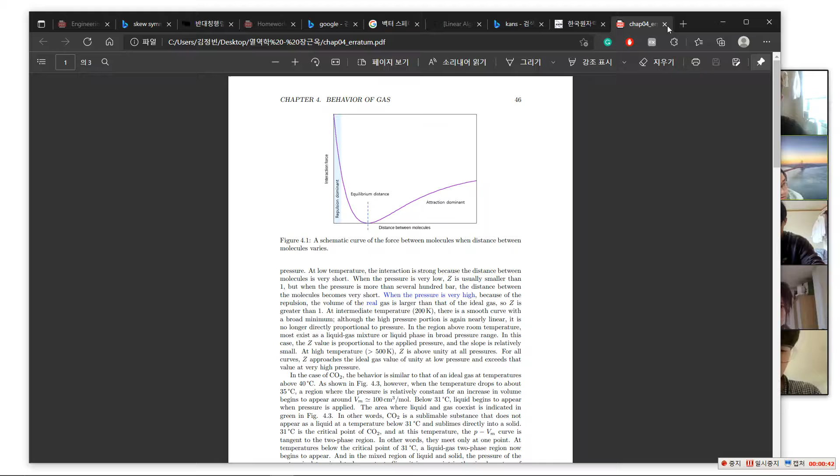So the concept of control volume is, if we want to apply the energy balance equation, in other words the energy conservation law, then the system has to be closed. System closed means the matter, material, or substance does not exchange.

Do not exchange. So let's say in a bottle there is 1 liter of water, it will not go outside or other substance does not come in. It is closed. Energy balance can be applied only on a closed system.

Assume you think about, let's say, a train. Then air has to come in, combustion takes place, and there has to be exhaust. The air comes in and combustion takes place, then there will be exhaust.

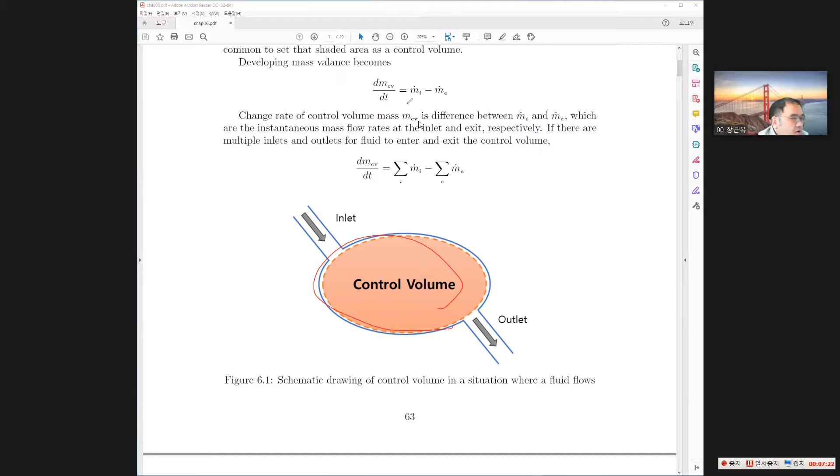There is no strict border line. So anyway, we can set a certain kind of abstract line which we say is a control volume, okay? For that reason, we want to apply energy conservation. However, typically, people want to also apply mass conservation, mass balance. Another terminology we say is mass balance.

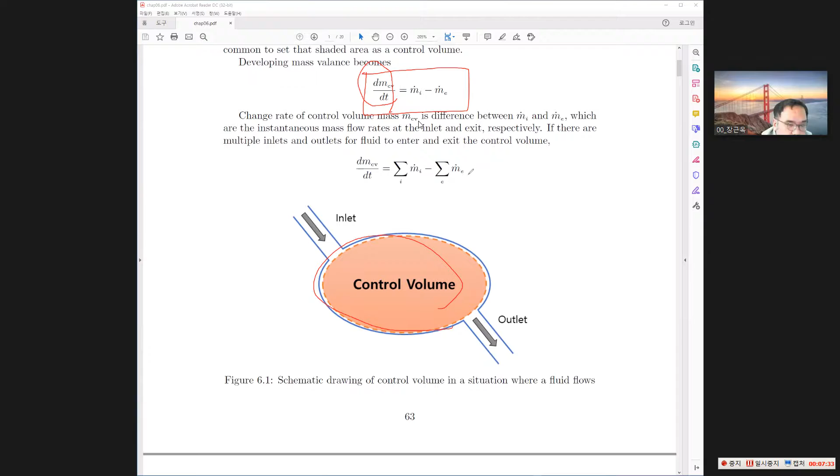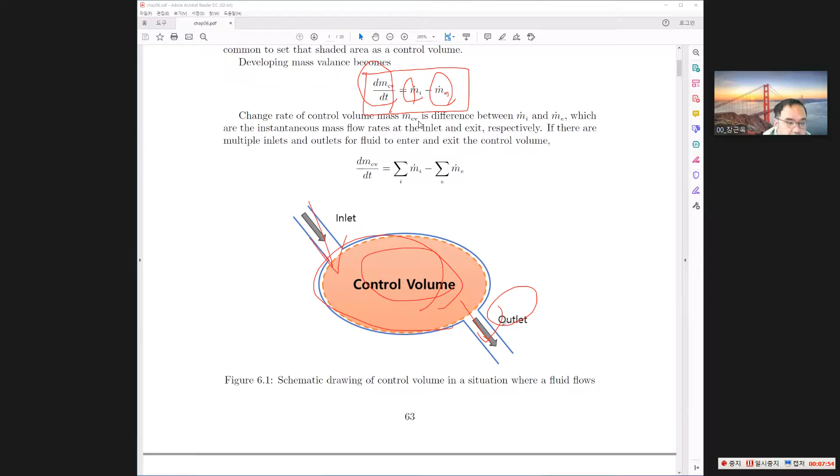Mass balance means the rate of mass change of the control volume is input, amount of input mi dot, amount of outlet me dot. In other words, outlet we also say is exit. So inlet exit or inlet outlet, both ways, okay. So it is typically very intuitive.

dm_cv/dt is, if there can be multiple inlets, then summation of inlet flow, minus summation of outflow, has to equal the change rate of the mass of the control volume.

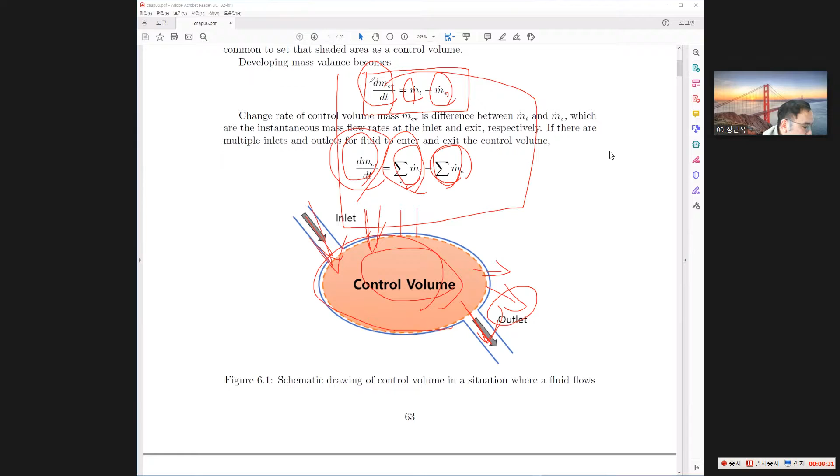So any questions on this? Fine? Okay. Here is one concept.

So v is specific volume. M dot is mass rate. Let's think about V, which is specific volume, determined by volume over mass. So in that case, what is the volume? Let's say, assume a kind of cylinder, and in that case mass is given, volume is given by A multiplied by height H. A is cross section, A multiplied by H.

Assuming the flow only, we assume unidirectional flow, like a certain fluid flows in only one direction. Then once we know the velocity, V dot is given by A times V, which is velocity. It is not volume, it is velocity of fluid, okay, velocity.

Because velocity means nothing but dh/dt in this case. Let's assume the height of the fluid region is h. So once we take dh/dt, it is nothing but velocity. So V dot, actually, V dot is AV.

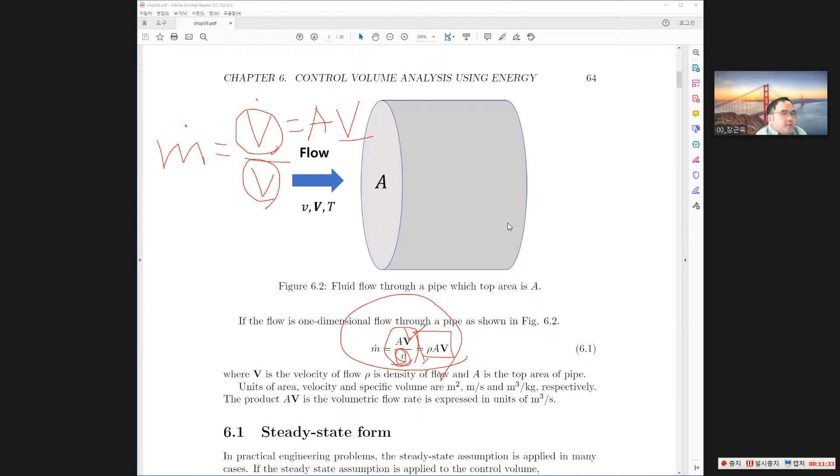So there are two ways, please don't be confused. In your textbook, I make it bold to prohibit the confusion. And inverse of the specific volume is nothing but density. So we can write it down this way. So any questions or comments on this relation?

Professor, yes. That V dot earlier, is that volume rate? V dot is V dot. You said V dot means AV, that means volume rate or what? Here it is volume rate, and here is now like a velocity. So those two are different. So volume, the velocity, I represented in bold symbol.

Professor, I have a question. How does the P come out, where is P, here? This? Yes, PAV. No -- rho is a density. Thank you. Rho.

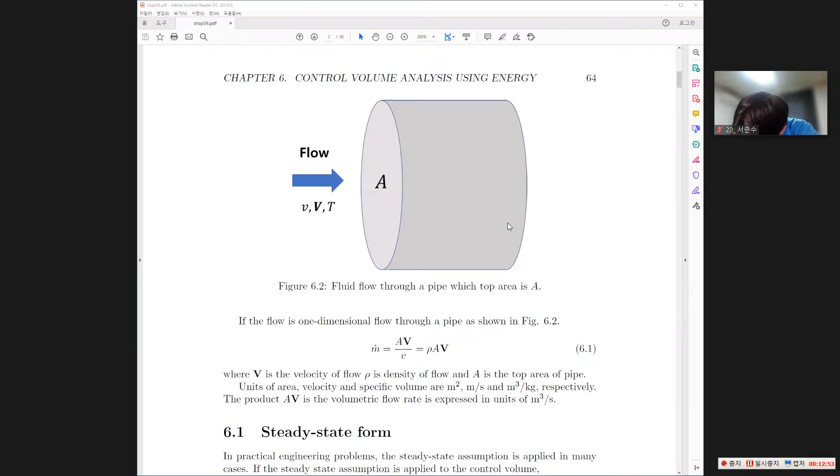Then we would like to move on to the other concept: what is steady state? Steady state means the state of the control volume does not change with respect to time. So dmcv/dt equals 0. It means the mass of control volume does not change. So in that case, those two values have to be balanced.

It's quite obvious, right? If you earn $100 and you spend $100, then your balance has to be 0, right? So it's like the same as the balance, right? Balancing, okay, so here is balancing.

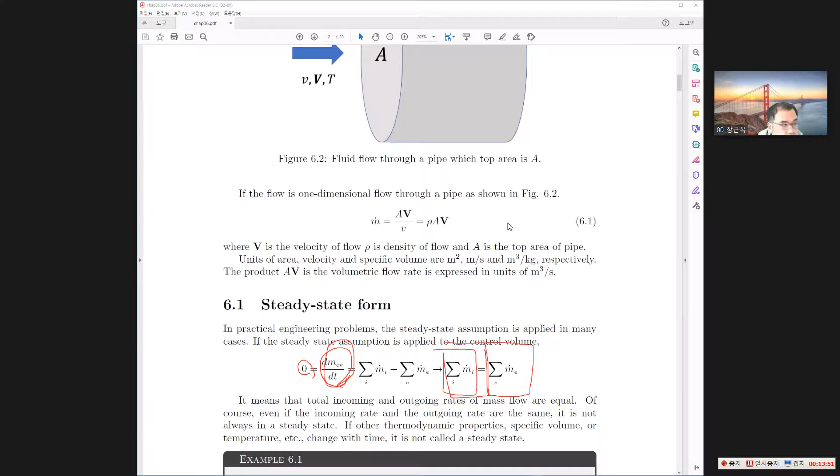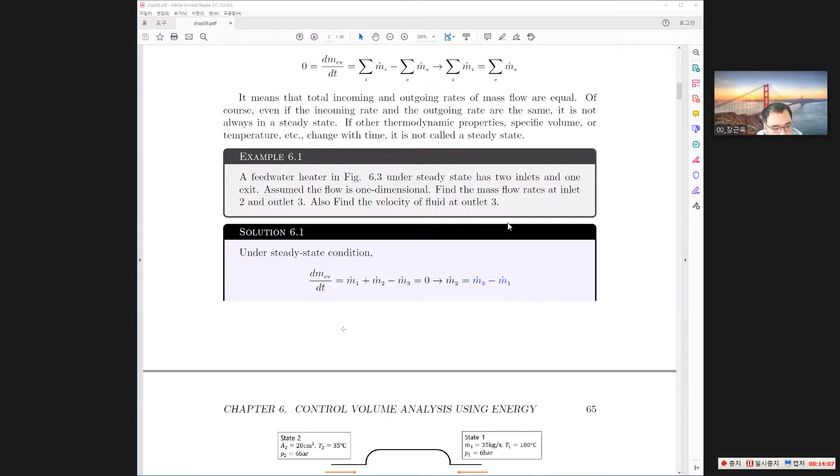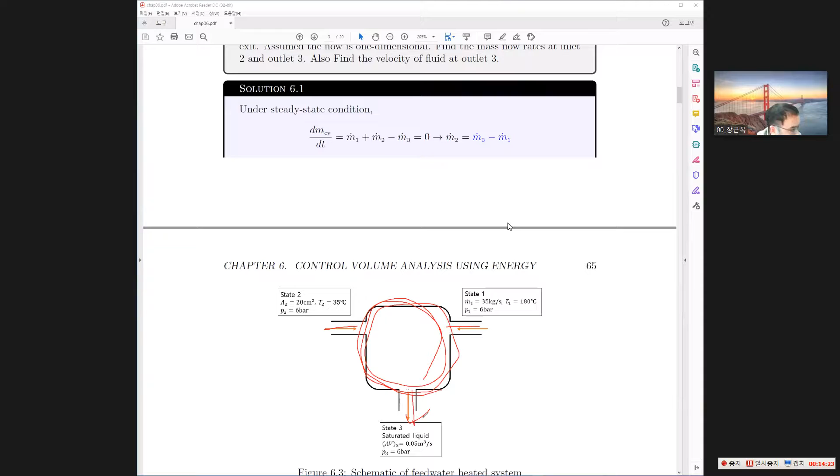Okay, so there used to be a typo here, on the blue side. So we have the opposite. Let's assume this system, and the control volume is here, and we assume that there are 2 inlets and 1 outlet. So why is there a positive sign? Because it is inlet, and outlet have to be negative sign. So by that way, we have M2 dot equals M3 dot minus M1 dot.

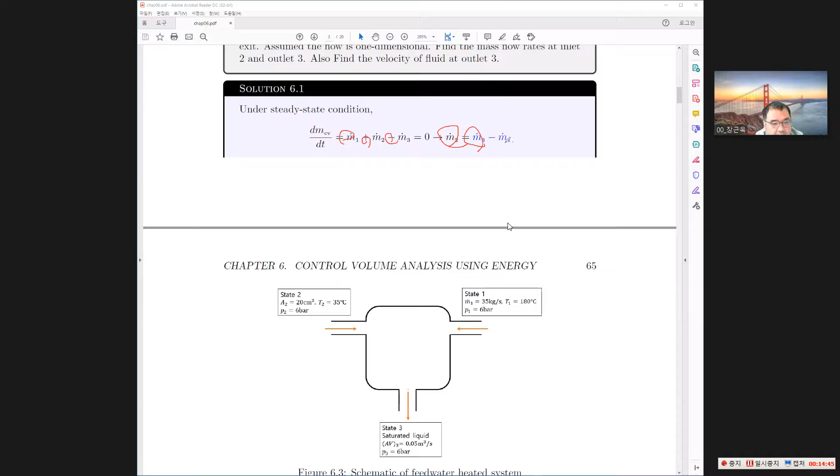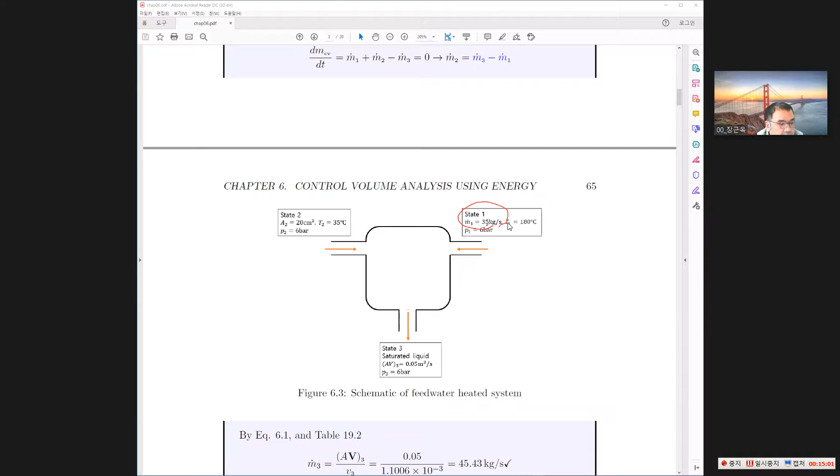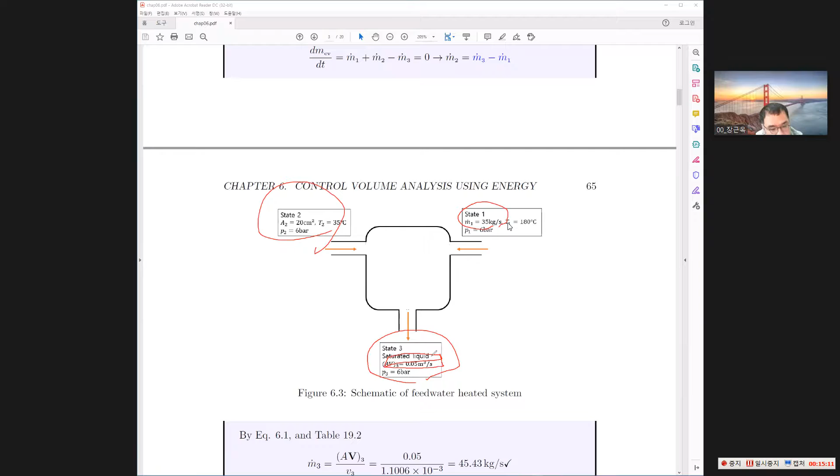By that way, first of all, M1 dot is already written in the problem, right? 35 kilogram per second. M2 dot, we don't know, we would like to calculate it. M3 dot, there is no direct value, but however, there is some information on it, so we would like to utilize it.

Formerly, we studied about those relations here. So once we divide by the specific volume, then we can calculate the M3 dot. Those specific volume values come from table 19.2, and we have what kind of information?

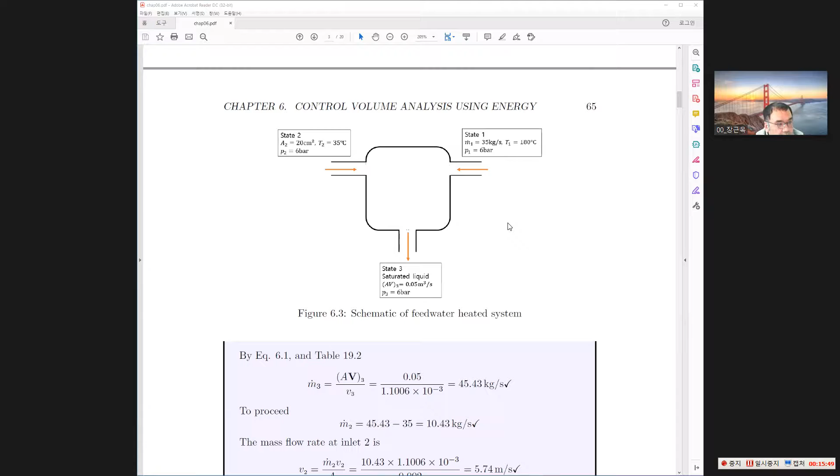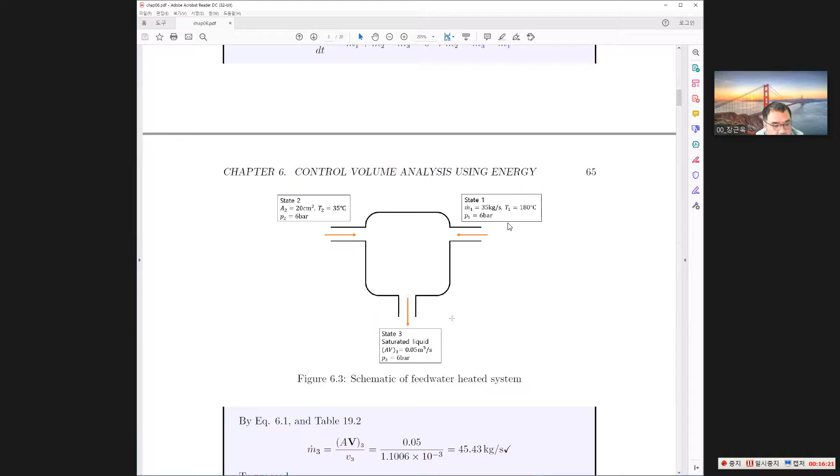Pressure. We have pressure information. Go to table 19.2. What was the pressure? Tell me, what was the pressure? 6 bar. Okay, so now we have the specific volume here, so we can utilize that information.

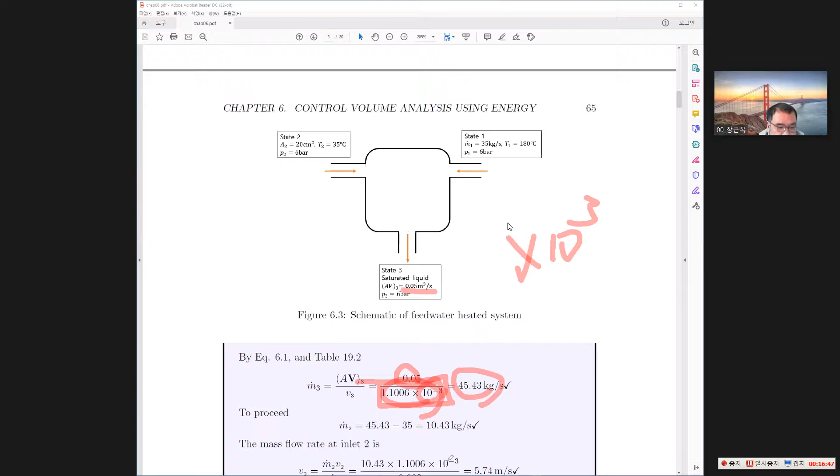There used to be a confusion. When I multiply by 10 to the 3 in the table, it means we multiply that value by 10 to the 3. Originally it is 1.1006 multiplied by 10 to the negative 3, and 0.05 is given in the problem. So once we divide it, we can calculate M3 dot as 45.43. So therefore M2 dot is given by 45.43 minus 35. We found that M2 dot is 10.43, by the mass balance.

Then how can I calculate V2? Also using those relations, we can calculate V2. At inlet 2, there is information on the cross section, so once we divide it, we can calculate the flow velocity, which is given by 5.74 meter per second.

So what is the main assumption? The main assumption is that it is a steady state, so mass of the control volume has to be conserved. Using that relation, everything is going on. If something is not clear on this problem, please let me know.

I have a question. Yes? In the inlet 2, I mean state 2, how do we know for sure that it is still saturated liquid?

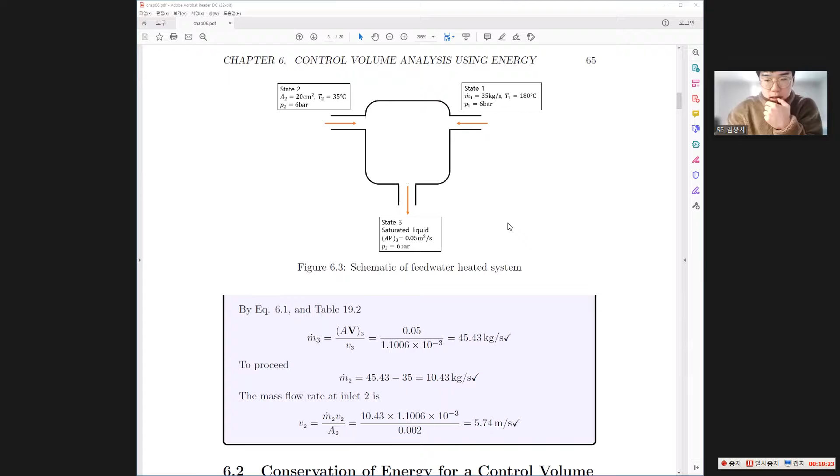So who are you? I'm Kim Yong-se. Who? I'm Kim Yong-se, Kim Hyo-su. It doesn't matter, however, yeah, okay.

Since we say in this case, there is a huge assumption that all phases are in liquid form, maybe it can also be still water. However, from the information about the temperature and pressure, it cannot be vapor, because we already know the temperature and pressure.

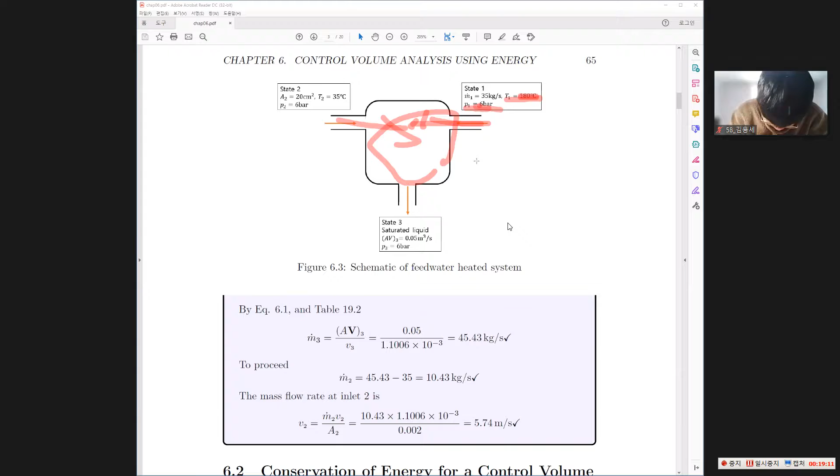Any other questions? It's a very nice question. Every question is very nice, actually every question is very nice.

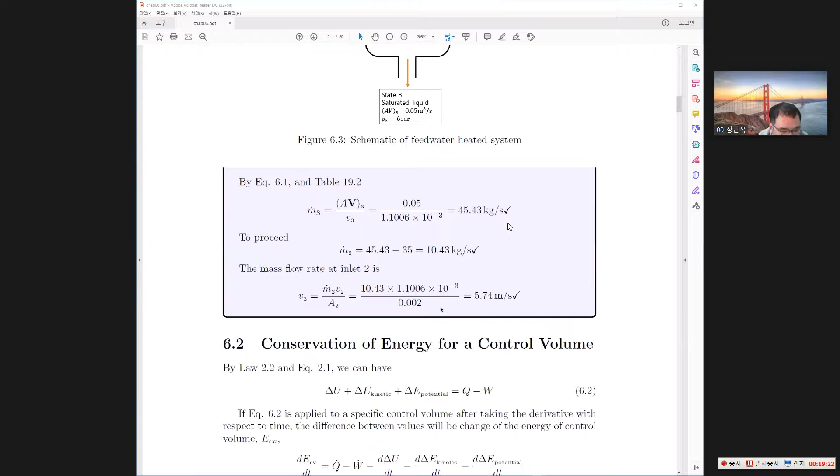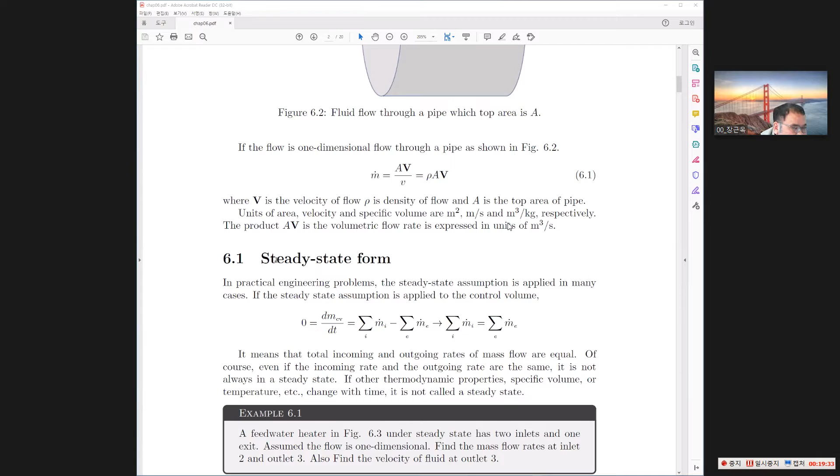Okay, so for the control volume, first of all, since it is steady state, we can apply the mass balance and the conservation of energy for a control volume. Let's assume we just consider the internal energy, however the system can have kinetic energy or potential energy.

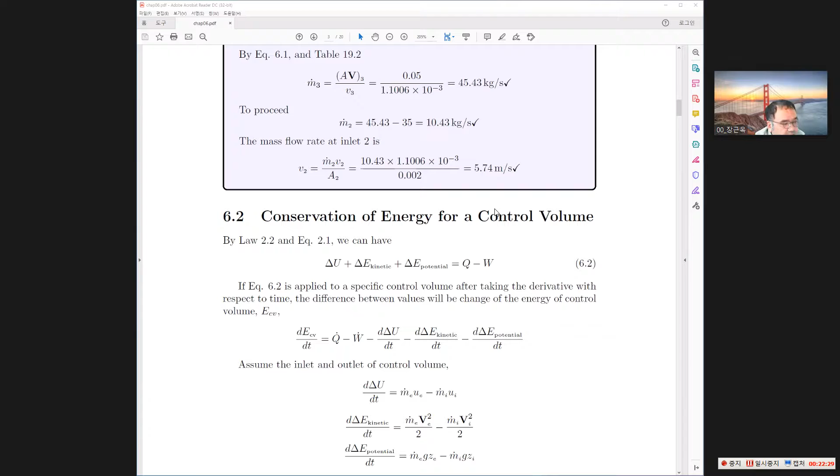Actually, there is some assumption there, okay? Here is the control volume and we have the inlet and outlet. If certain property changes here, then it is given by the difference between exit and inlet. Okay, that is a huge assumption.

However, generally, it is quite a reasonable assumption. You know what I mean? If a certain property changes, then it is given by the rate difference between exit and inlet. That is the assumption, by the control volume analysis we would like to do.

So now we have the energy balance equation. Now it changes like this way, right? Because using the information here, that is the energy balance equation.

W dot is delta F dL dt. Force is given by pressure multiplied by area. And delta dt dl, and we say dl dt. dl dt means assuming those kind of area and one directional flow. So dl dt means velocity.

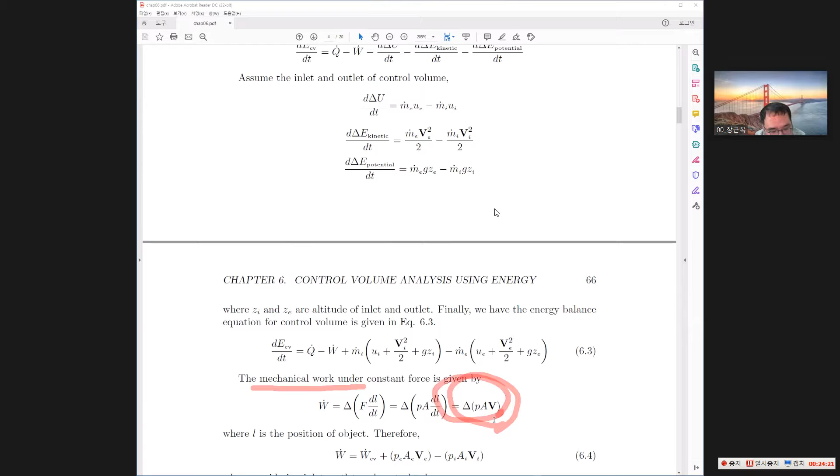So it is given by delta PAV. So in the mechanical work, we can have W dot is delta PAV. So total W dot is given by W dot of the control volume, and there is work at exit and work at the inlet. So their difference term is there.

And we already have the relation that AV is M dot V, AV is M dot V. So finally, we can write down W dot is given by W dot CV, M dot Pe Ve, M dot Pi Vi.

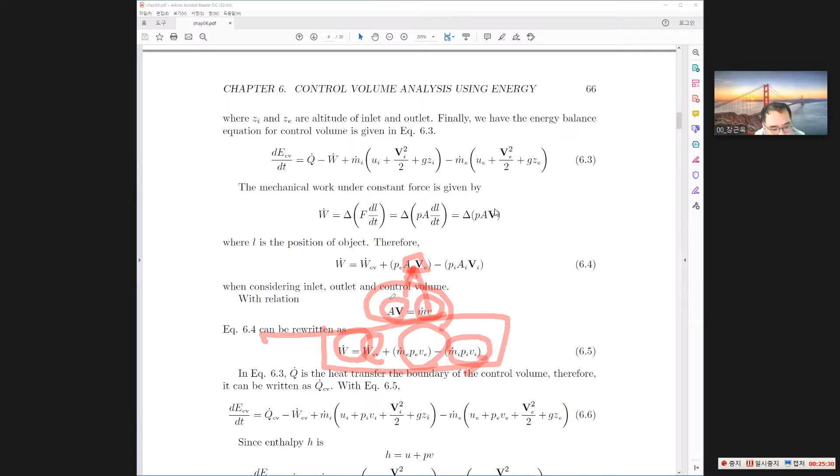Okay, where does it come from? Because we have the relation here, so AV can be replaced by M dot V. So we replace those AV with M dot V. So still there is pressure there, so we can write those out.

So far, okay, I will give you 1 minute. Something is not clear, then please ask me. Up to 6.5, I will give you 1 minute.

Professor, I have a question. Yes. Why there is W dot CV? Because in the control volume, there is also a certain kind of work rate. Without the inlet and outlet, the volume also has some kind of work. Okay, very nice question.

Any other? Fine. Okay.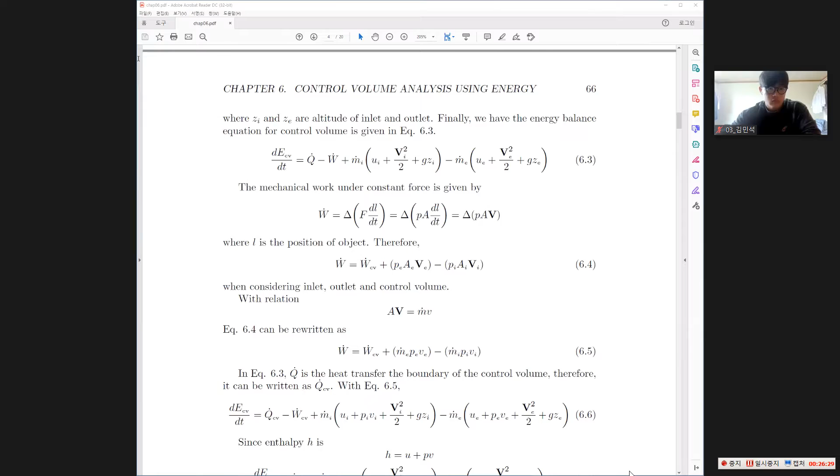Okay, then finally now we have Q CV. We assume that Q is the heat transfer at the boundary of the control volume. So Q dot is assumed to be the same as Q dot CV, because there is an assumption that heat cannot be generated inside the control volume. But I would like to ask, if there is a kind of chemical reaction or nuclear reaction, then heat can generate, right? Let's assume there is a certain kind of chemical reaction or nuclear reaction, then heat can generate. But in this case, to simplify the problem, we do not take care of those kinds of reactions here.

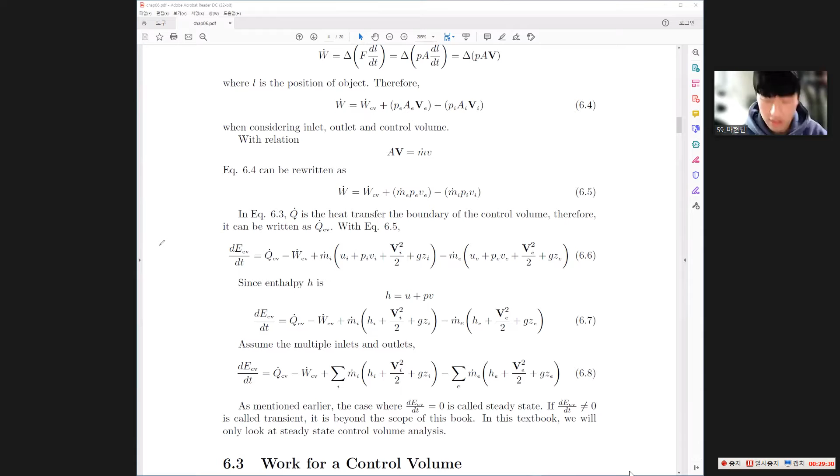Actually, we multiply by mass there, then it becomes just enthalpy. However, we want to control those mass rates separately. So actually, if we multiply it, then it becomes the same, it's total enthalpy. It becomes that.

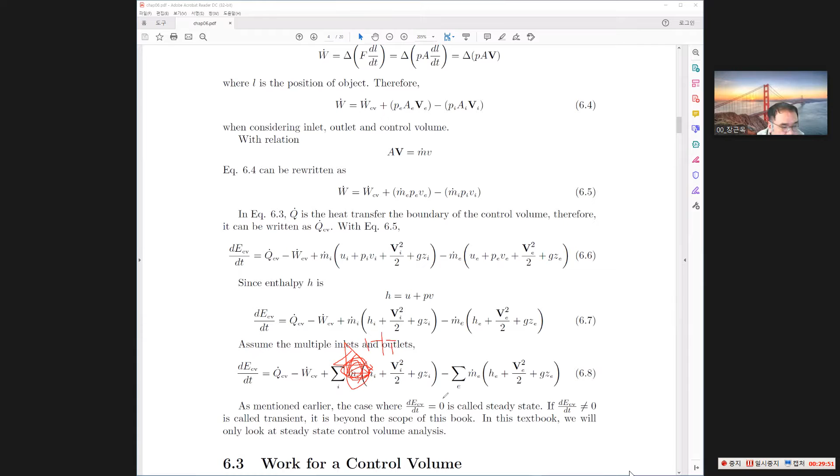Assume there is no accumulation of mass within the control volume. It means mass does not change. So we can write it this way. Those quantities are the same as here, and we can represent them by m dot. So we can replace by m dot, then the equation can be rewritten as here.

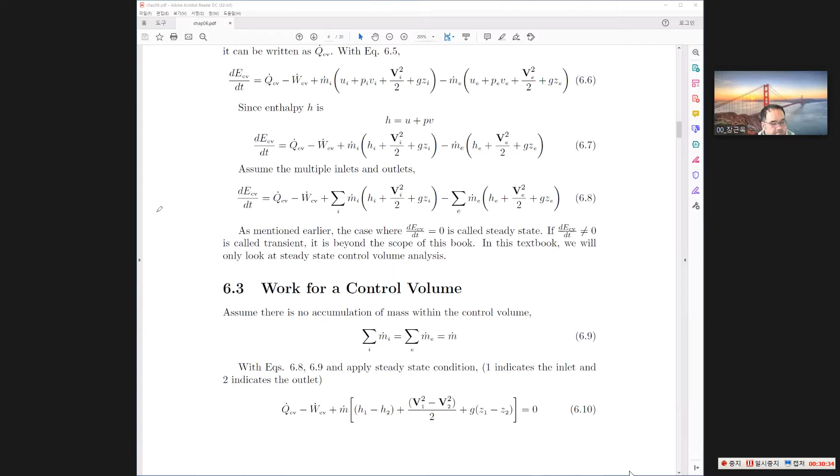So there are two devices, nozzle and diffuser. Maybe you have learned about this. Or you go to the market, there is a nozzle and diffuser. Recently people say diffuser is kind of a perfume, like a perfume in your room, people say it's a kind of diffuser. That diffuser is different from here, it's not that diffuser.

So there are two devices. Then what is nozzle and diffuser? Actually it is a little bit tricky. However, in general, let's say here is outlet and inlet, then when V2 is bigger than V1, we call it a nozzle. And when V2 is smaller than V1, the figure becomes opposite.

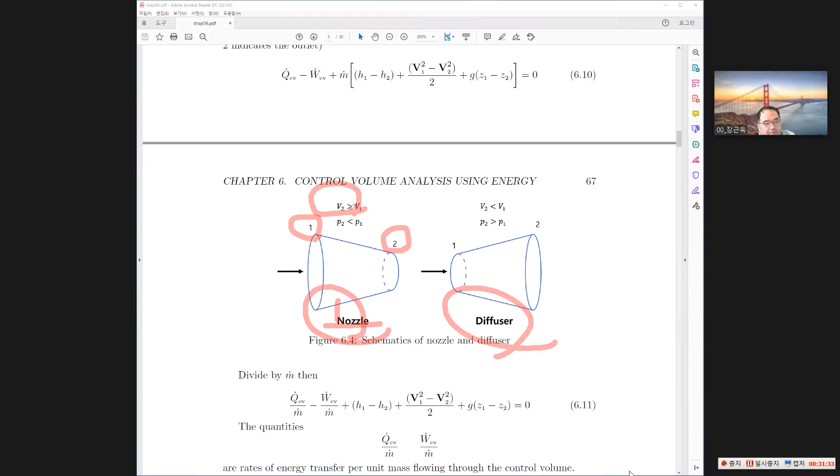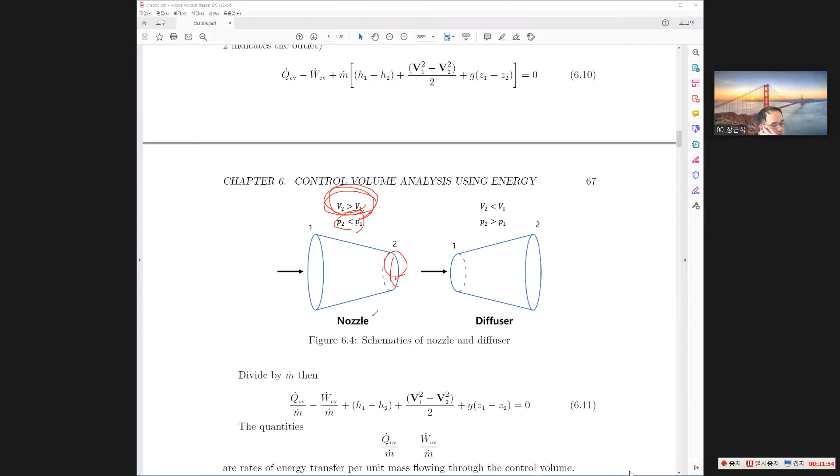Sorry about that, it is not volume, it is velocity and pressure. So when V2 is bigger than V1, it means the fluid is faster at V2 because the area is small, the area is small, then we say it is a nozzle. And when V2 is lower than V1, it means P2 is higher than P1, then we call it a diffuser.

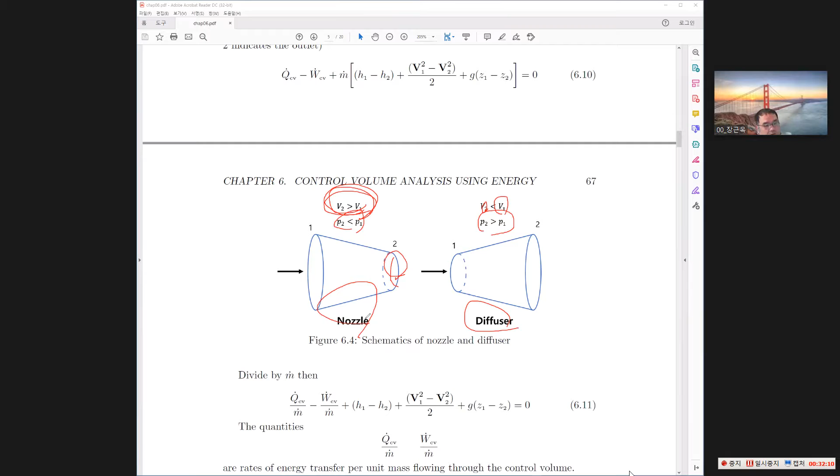We can divide by m dot, then it can be written by the equations here. And there is a certain quantity here that we say is the rate of energy transfer per unit mass flowing through the control volume. So it is energy transfer per mass by the heat, and energy transfer per mass by the work.

Any questions on this? Fine.

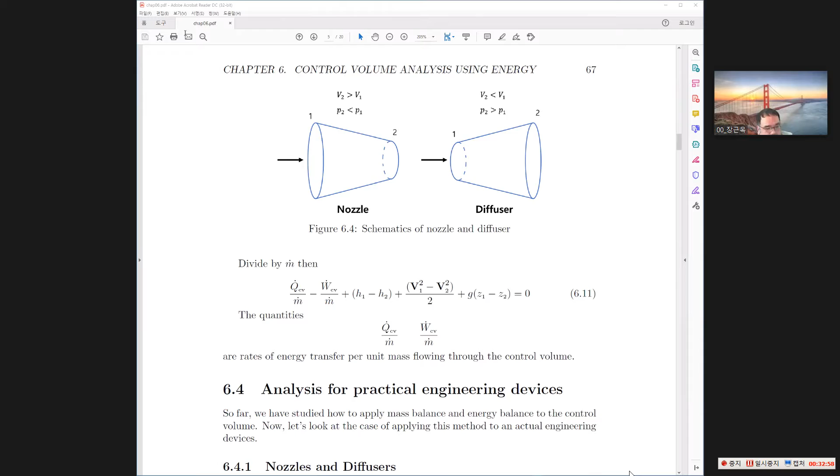Okay, let's think about the case of nozzle and diffuser. We would like to make the problem a little bit simple. So we assume that energy transfer by work is not present, so we assume it is zero for nozzle and diffuser.

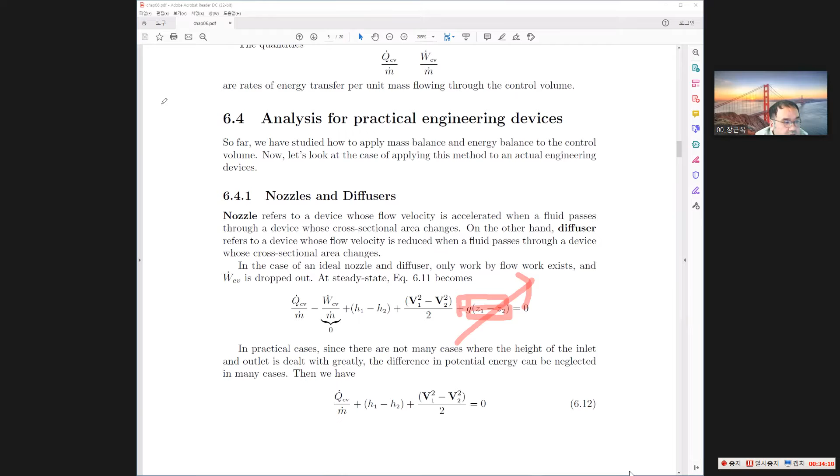The difference in potential energy can be neglected in many cases. If we have to consider it, then we have to keep this term. However, if this term is negligible, then we usually omit it, assuming the height of inlet and outlet is comparable. Now only three terms survive.

So this is not the only form, however, it is the universally used energy equation for the nozzle and diffuser. We usually apply this type of energy rate equation for nozzle and diffuser.

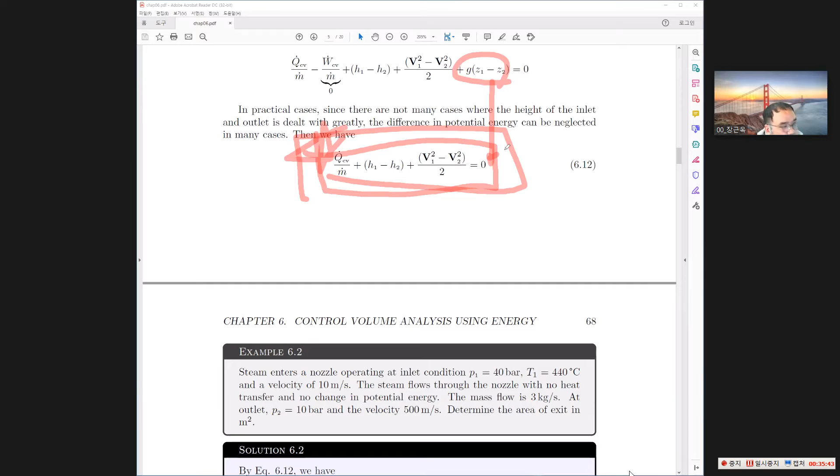Okay, so steam enters a nozzle operating at inlet condition. P1 is 40 bar, T1 is 440 degrees Celsius, velocity 10 meter per second. Steam flows through the nozzle with no heat transfer, no change in potential energy.

So there is a problem. I already give two conditions: no heat transfer, no change in potential energy, okay? So please neglect two terms. The mass flow is 3 kilogram per second.

At outlet, 10 bar, 500 meter per second. So you can see here, this is the nozzle, and the difference between velocity is very high, okay? 10 meter per second and 500 meter per second. So here the pressure is way higher, 40 bar and 10 bar, okay? Let's go to the analysis.

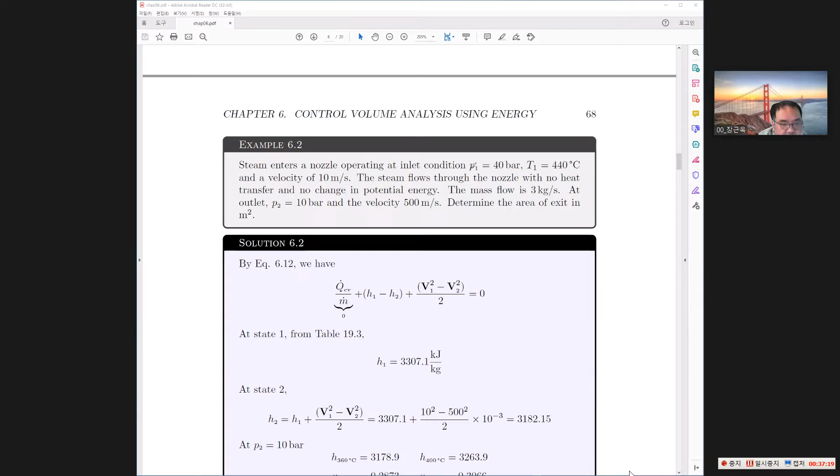Equation 6.12, and they assume that, okay, now we want to omit heat transfer or change in potential energy. So no heat transfer means this term is also zero. This term is also zero. So at state one, there is information about 40 bar and 440 degrees Celsius.

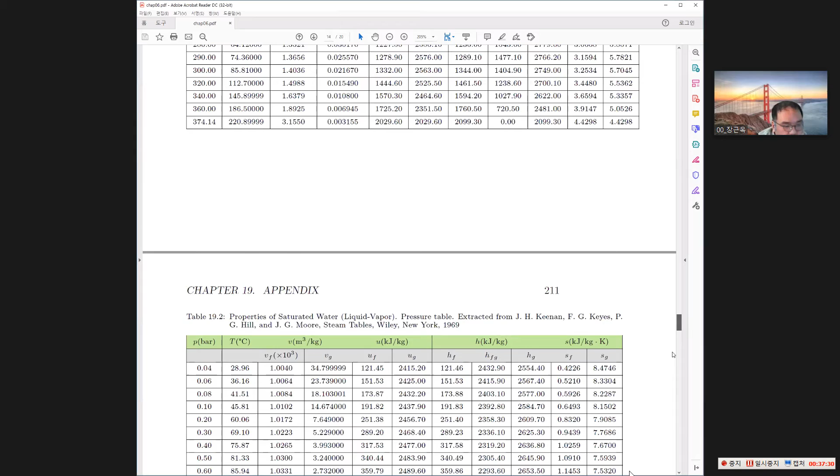Okay, so let's go to table 19.3. So what is the pressure? 40 bar, right? So go to the 40 bar. Okay, now we find the 40 bar here. What is the temperature? 440. Okay, very nice. So we can read the enthalpy, right? We know what H1 is at 440. Yes, right? So here, okay.

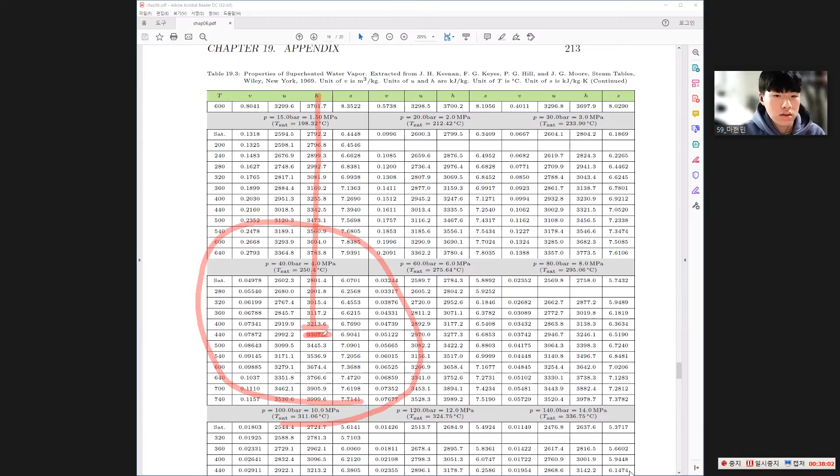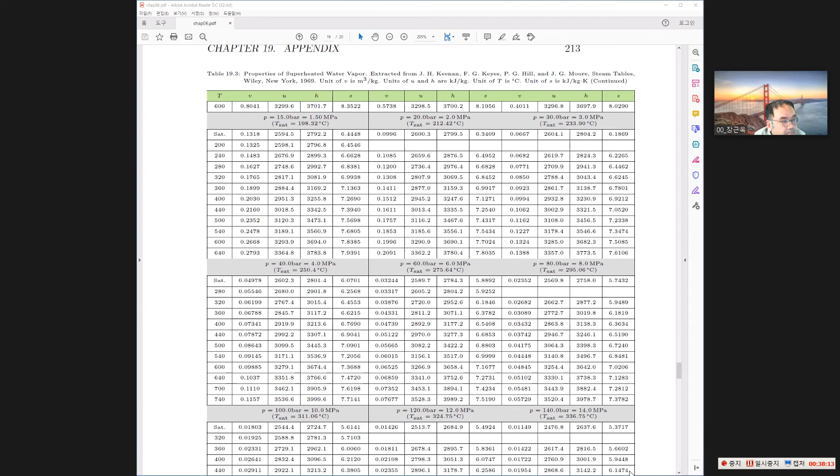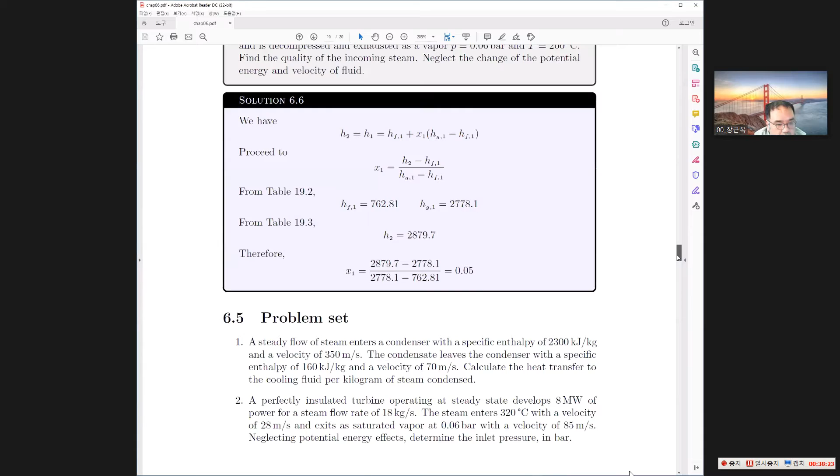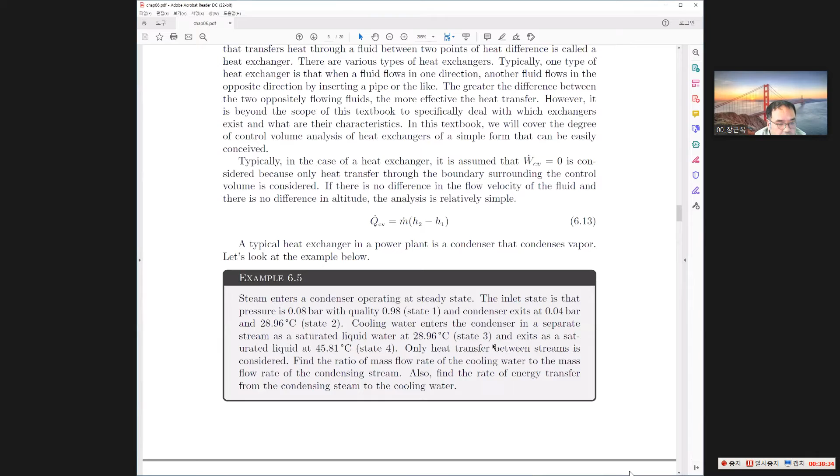So we can read the enthalpy, right? So there is a pressure and temperature, so we can read the enthalpy, okay? That's how we read the steam table. So go back. So we can read the H1 from the table here.

As state 2, we do not know the H2 value. However, by the balance equation, we can calculate it. Since we know the H1, so we can calculate the H2 as well, right? So H1 plus this much. We know the H1 and we know the velocity of the two states, so we multiply here, then we can get H2 by the energy balance. Okay, by the energy balance, we can calculate H2.

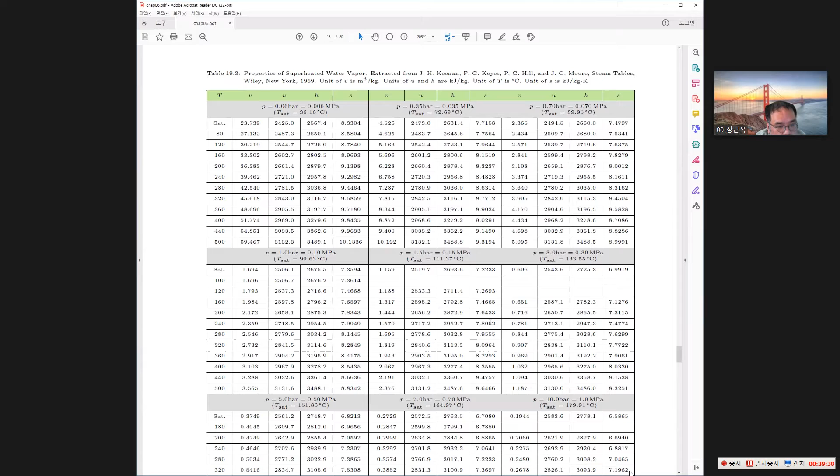What is the pressure of state 2? Okay, then go to table 19.3. So what is the pressure at state 2? 10 bar. And what is the enthalpy value? 3,182.

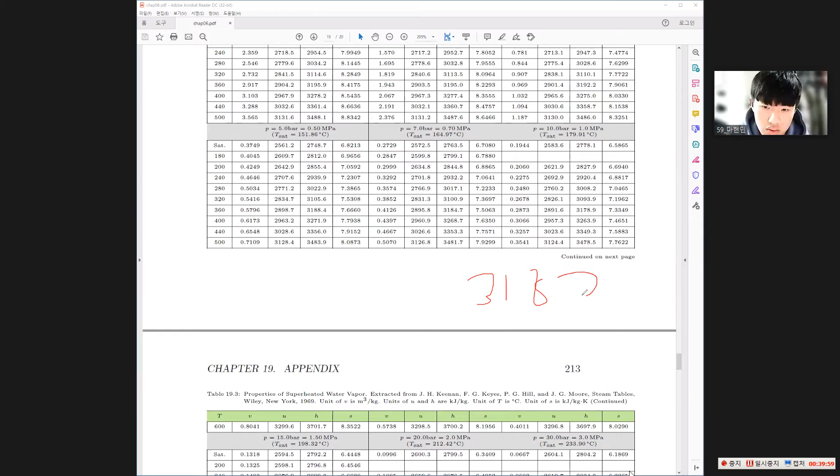3,182. So we found that it is placed between two rows, right? So we choose those two temperatures, 360 and 400, and by interpolation, we can assume the temperature.

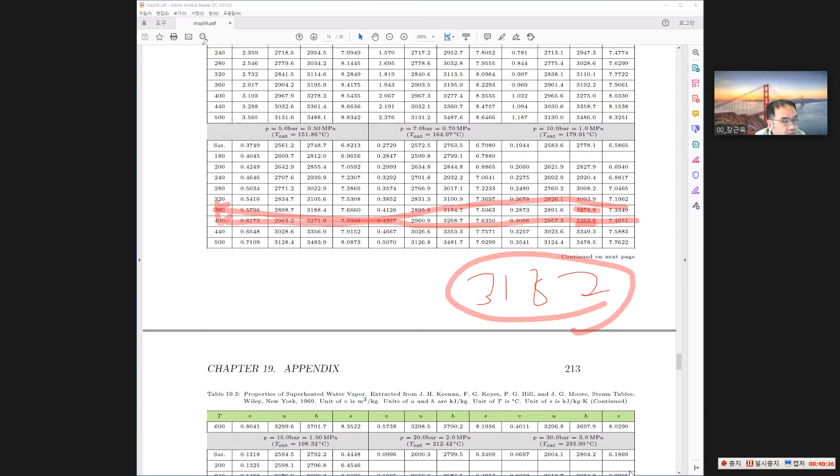Let's go back. Okay, so now I think you have a clear picture. Why do we choose those two temperatures, 360 and 400? So here we can read those two values and specific volumes. So by interpolation, we already obtained H2 is here, and H1 is here, and the difference between two values means the difference between here and here. Subtract this much from here; it is 85.

And that is interpolation - let's assume the H changes linearly between 360 and 400. Then by this relation, we can estimate T2, and T2 is given by 361.69 degrees Celsius.

So once we have the temperature, then we can also estimate the specific volume at temperature 361.69 degrees Celsius by the same consistent interpolation formula. So we already know V360 and V400. By those relations, we can estimate V2, and it is given by 0.2876. And finally, since we know the specific volume, we can have the area A2, and that is given by this much.

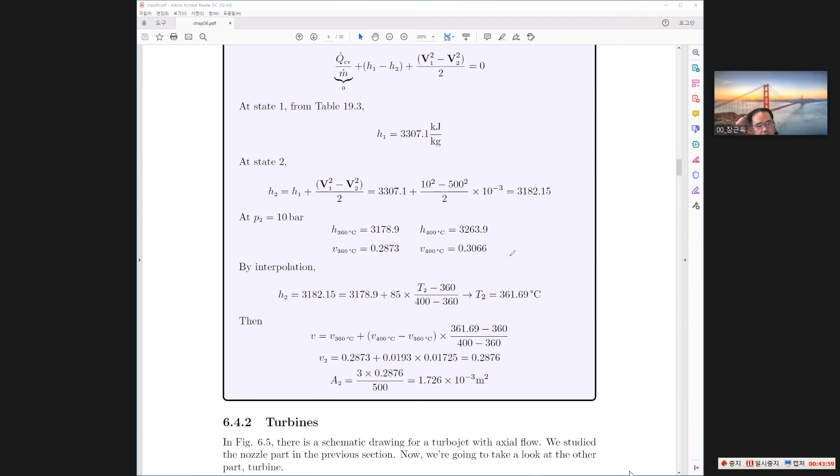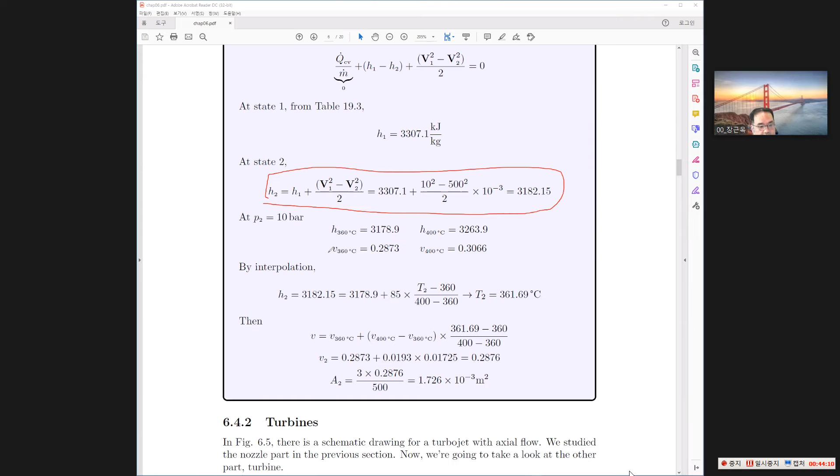Okay, at this moment. Now we have the enthalpy, and we just interpolate. So we do not know the temperature. So how can we interpolate by volume? I don't understand.

Interpolate by enthalpy? What I mean was interpolate between the specific volume by the given enthalpy. Oh, okay, okay. So not going through the temperature, just go straight.

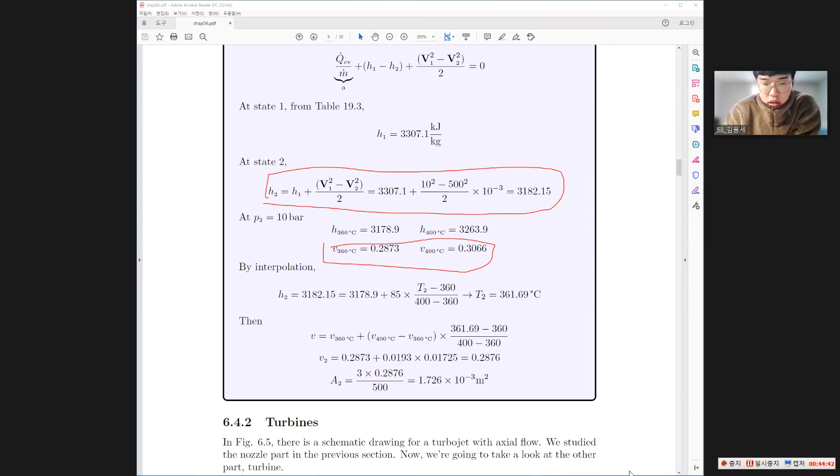You are talking about, let's say V equals V at 360. But if we do not evaluate the temperature, then we can choose 360 and 400, because at least we have to know those two values to evaluate. However, without that, is it not possible to evaluate using the enthalpy? Maybe I do not catch your question.

That is correct. So you do not want to evaluate the specific volume using the value of 360 or 400? That's what you are talking about?